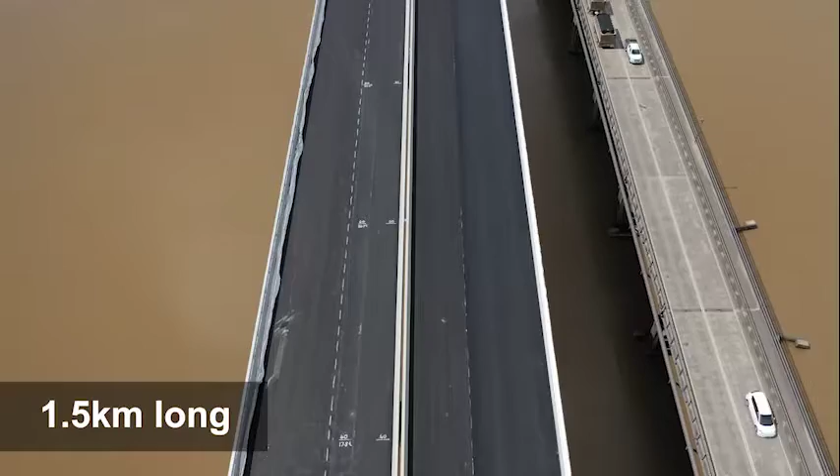I am the project director for Pacifico, in charge of design and construction of the Harwood Bridge. The bridge over Clarence River at Harwood is a design and construction contract for a 1.5 kilometer bridge delivered by Pacifico, Acciona Ferrovial joint venture, as principal contractor.

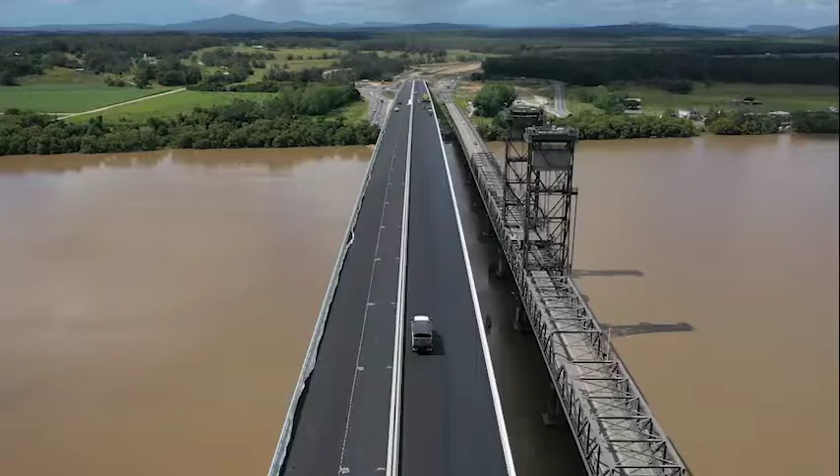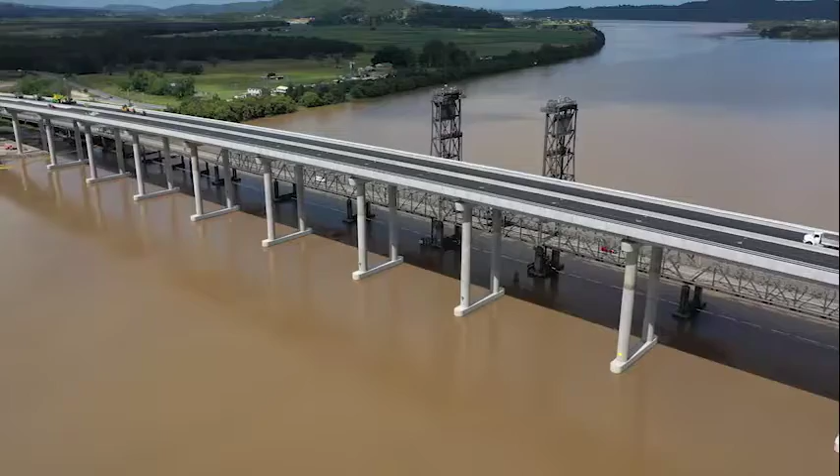The project is just a small part, 1% of the total length of the 155 kilometer project upgrading the Pacific Highway from Woolgoolga to Ballina under a delivery partner model by Pacific Complete, Laing O'Rourke and Parsons Brinckerhoff joint venture, for RMS as the final client. Even though it is a small project in comparison with other civil projects, it has been very challenging in terms of safety, environment, community and time frame.

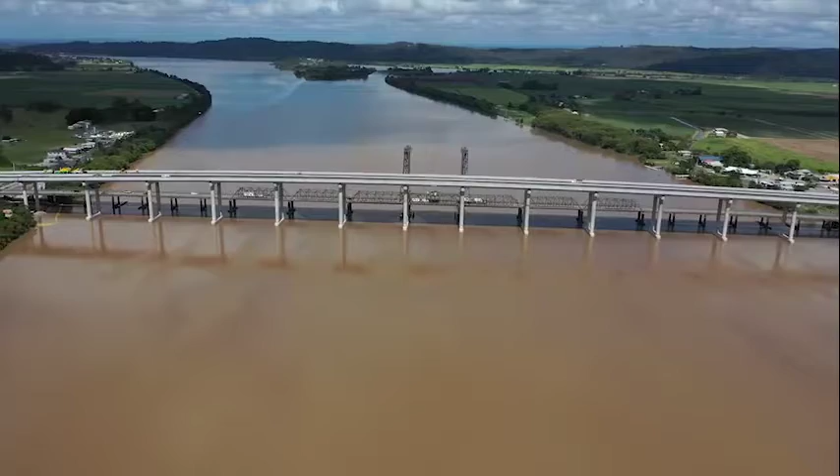The most impressive achievement to highlight has been the delivery of this huge structure in just two and a half years, starting from a blank piece of paper. The geotechnical investigation, design, procurement and construction were overlapped, assuming reasonable risk without taking any shortcuts in terms of safety, with no relevant environmental incidents or community complaints.

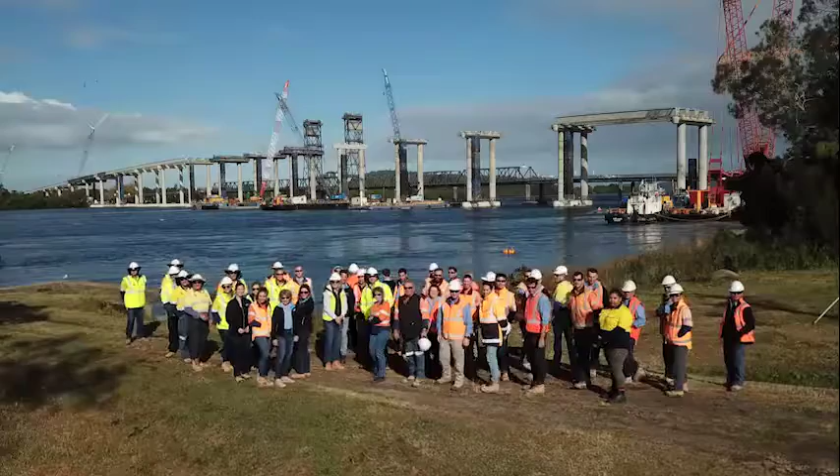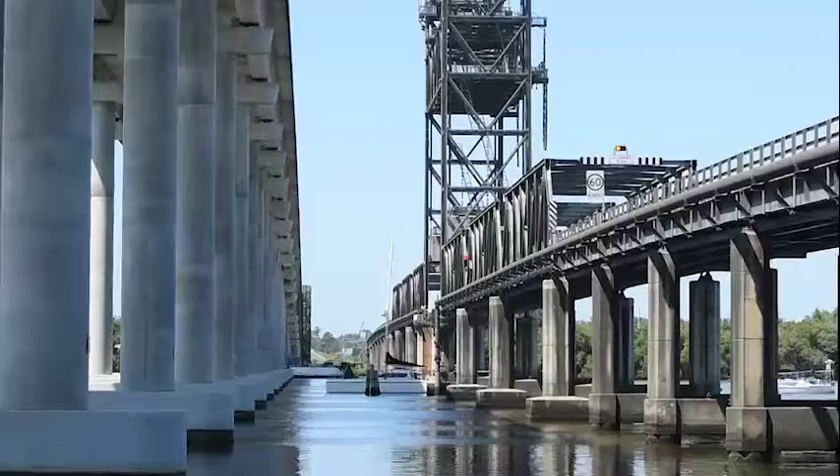The secret for that? A very strong and high performance team and collaboration between the parties involved. We are very proud to show you how this project has become a new benchmark in the construction industry. For the last 2 years, the AFJV team have been involved in construction of the new 1.5 kilometer long bridge over Clarence River, 20 meters downstream from the old one opened to traffic in 1966.

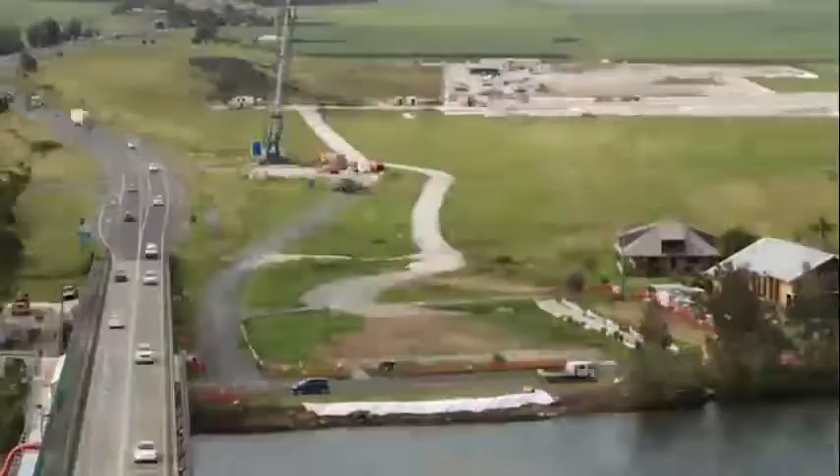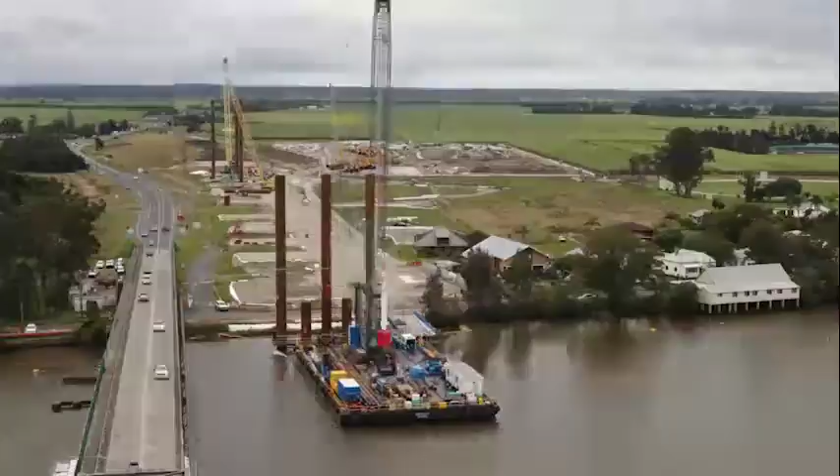We started with the site compound setup, concrete mobile plant and precast yard establishment in order to start manufacturing of a new innovative flagship product, U-girders. In parallel, we were mobilizing barges and big crawler cranes, building a temporary jetty, and starting driving steel driven piles, one of the biggest piles in Australia, requiring a specialized hammer imported from Singapore.

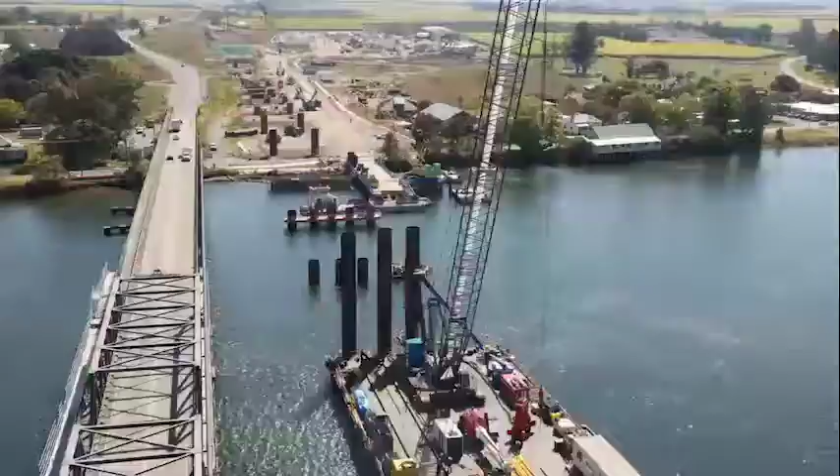At our peak time, there were 4 barges, all fitted with crawler cranes, working alongside and engaging in all marine substructure works carried out simultaneously. All works were done by an experienced FAJV self-performance crew and highly specialized subcontractors, providing a high level of performance.

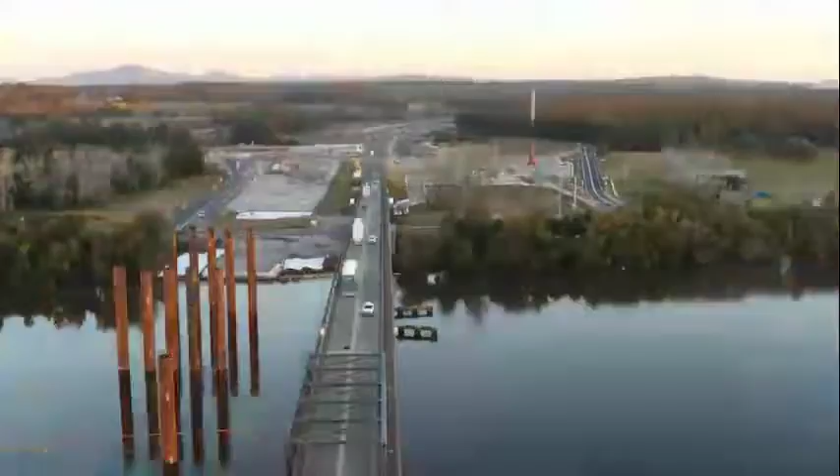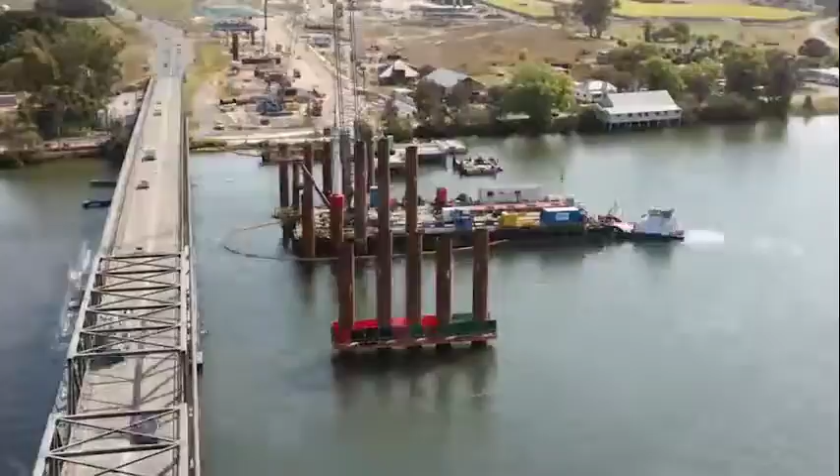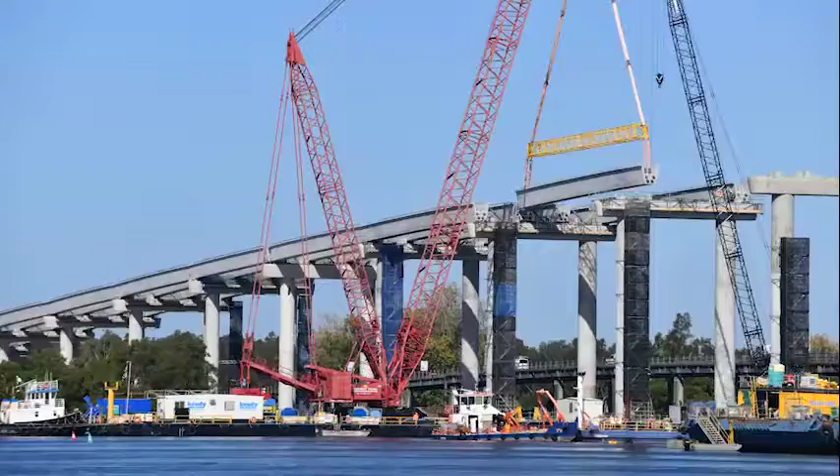The marine works have been one of the most challenging parts of this project, and they started late in 2017 with the construction of the piling and continued later with the construction of the pile caps, columns and headstocks. Maybe the most impressive activity was the installation of the 48 girders utilizing the 750-ton crane on top of the Rebecca Lilly barge.

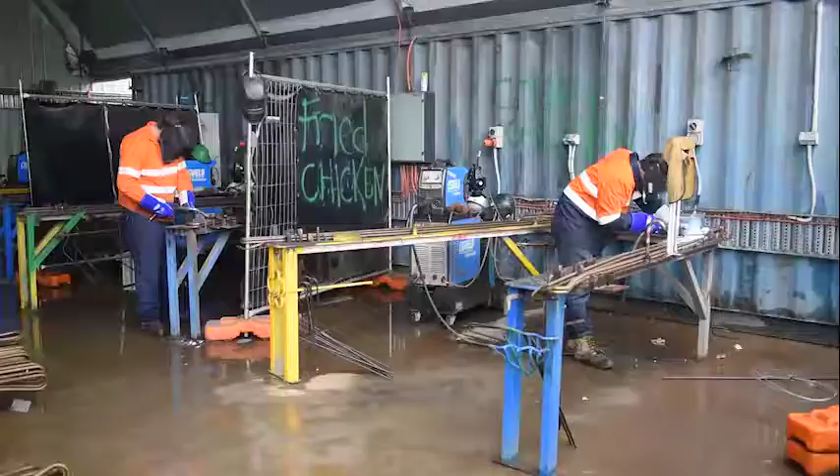We established a facility to produce 144 girders, but we also produced transfer panels and parapet barriers. We commenced building the precast facility in May 2017 and produced our first girder in September 2017. Our production process was quite efficient. We were able to produce up to 5 girders a week, and we commenced delivery to the bridge in November 2017.

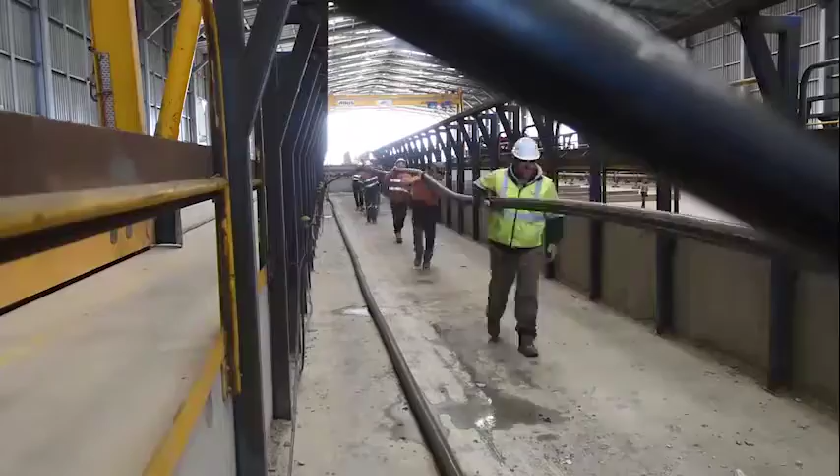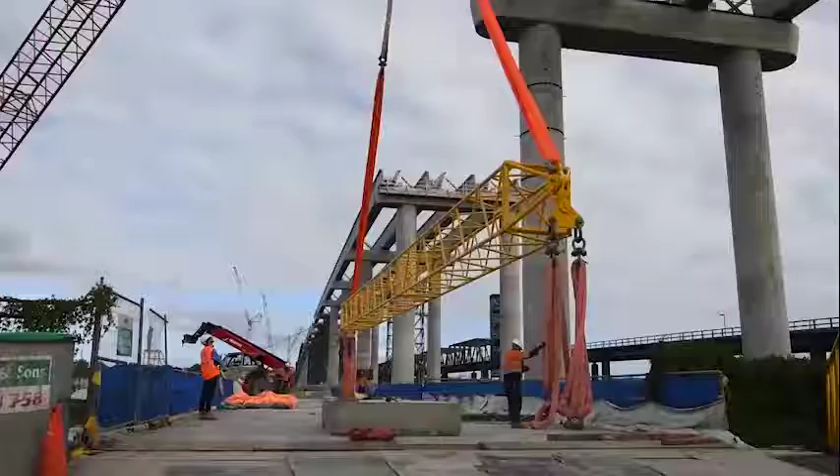The last step of the process was to deliver the girders to the river, where we used the straddle carriers to take the girders down to the jetty, where they were lifted onto a barge and out onto the river. Production of the girders was completed in June 2018, and the last delivery was in July 2018. We also completed the transfers and parapets, where the last one was erected in November 2018.

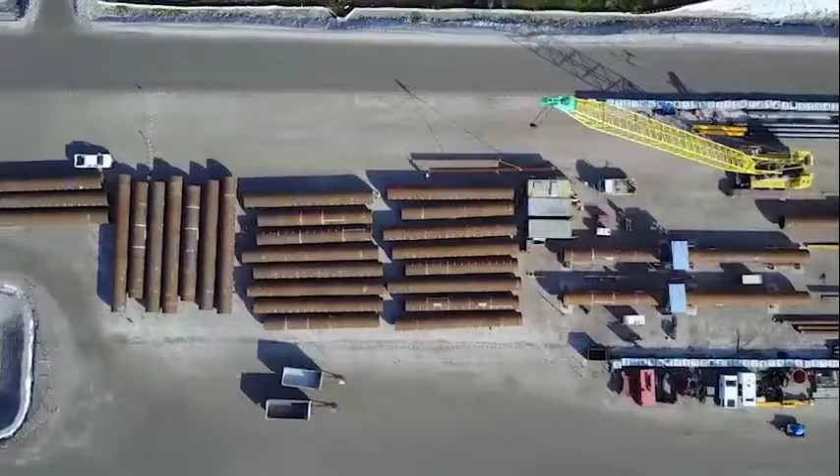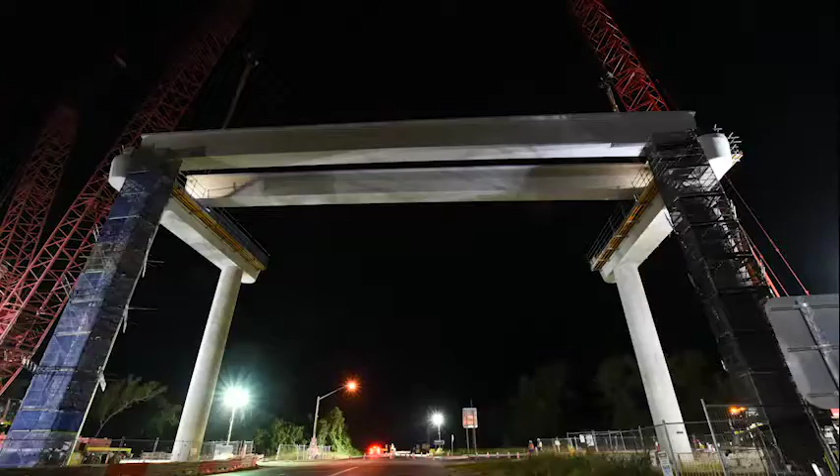The new bridge has been a fantastic project with many engineering challenges, from huge 60-meter long, 2.4 meter diameter steel piles to a 750-ton crane lifting 169-ton girders onto the substructure. We have tackled and resolved all these challenges in collaboration with the Pacific Complete team and RMS.

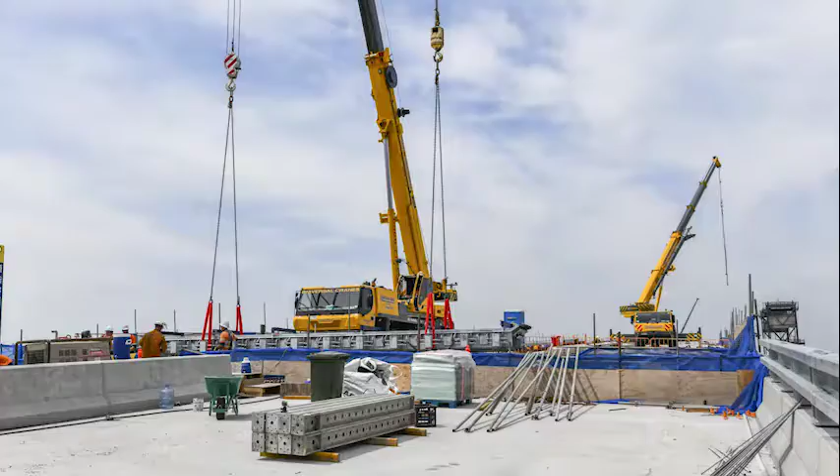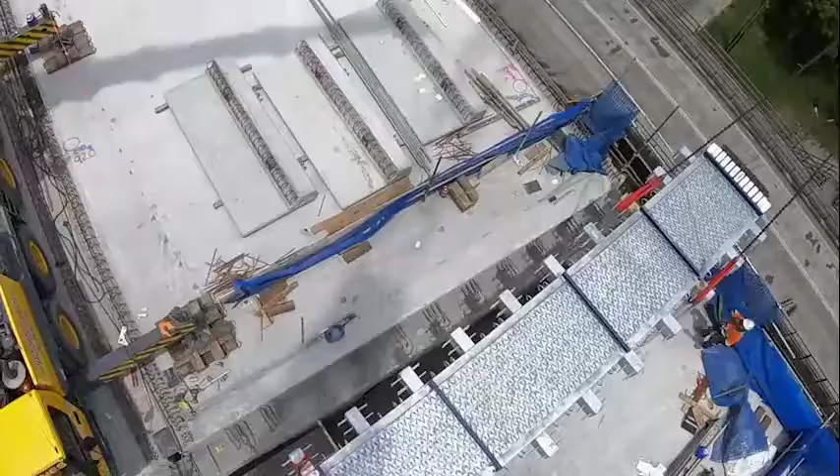One of the major innovations that we have on this project are the sinus plate expansion joints located at each bank of the river. The client had concerns over noise issues. These sinus plates have noise mitigation plates at the top which muffle the sound created by traffic. We have rubber curtains and noise curtains at the bottom of the expansion joints, which results in a very quiet expansion joint system.

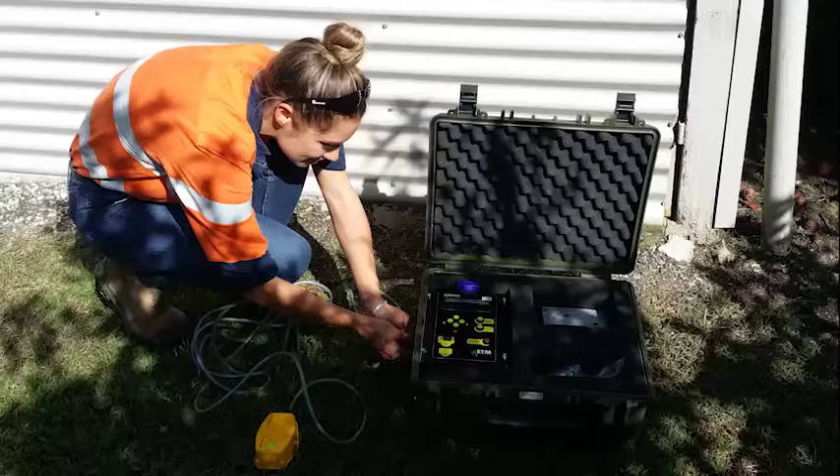The Harwood Bridge design and construct project over the Clarence River has provided many opportunities to avoid and/or minimise adverse environmental impacts on the local industry, such as the prawning industry, our local community and the Clarence River. Some key achievements have been driven piling, chosen over bored piling to reduce the amount of acid sulphate soils produced, attended vibration monitoring, providing real-time feedback to the piling operator, and developing and implementing procedures during piling to protect the resident population of dolphins, such as shutdown zones and soft starts.

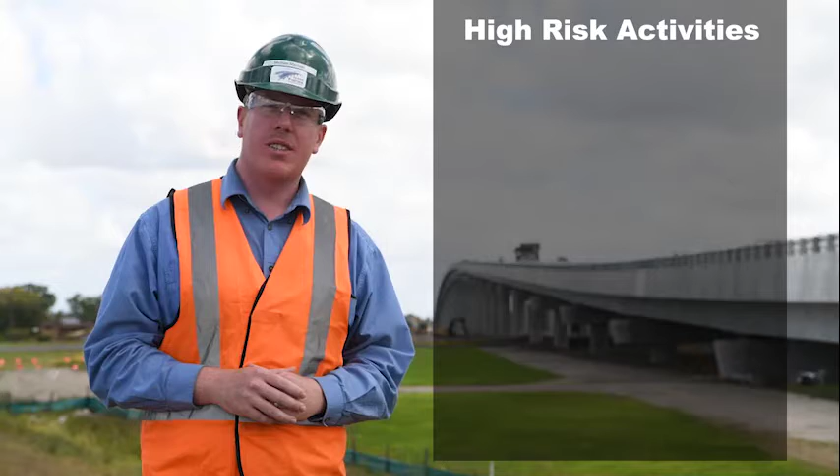As part of this project, developing and implementing a clear and positive safety strategy has been a key to its success and a number one priority. Due to the complexity of the structure and the associated safety risks, there have been a number of key challenges to overcome. These have included managing the following high-risk activities: temporary works, plant and equipment, cranes and lifting, working at heights, electrical work, precast concrete, work over water and traffic management.

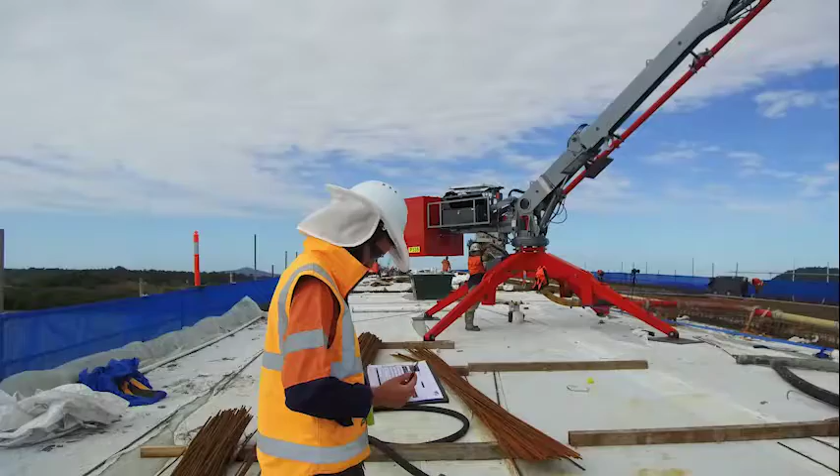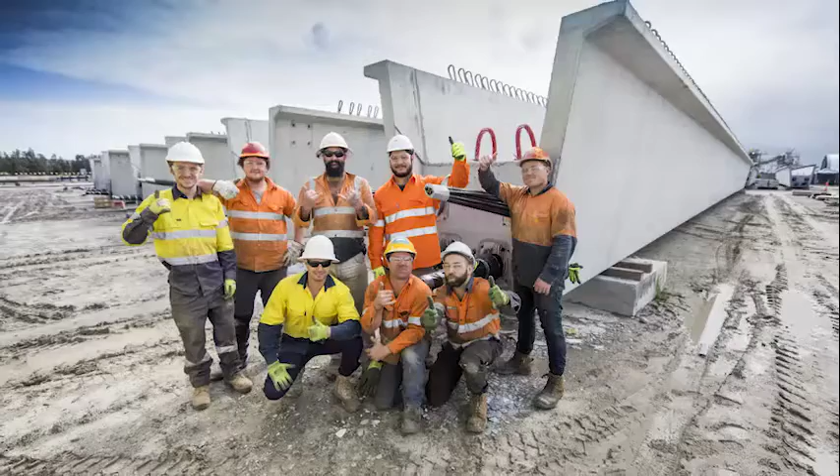Good outcomes have been achieved in these areas by placing empowered people at the centre of decision making and in doing so ensuring transparency and accountability. Empowering our people has been achieved by implementing the following measures: displaying visual leadership on site on a regular basis, being available to discuss any issues on site through our SLT engagement walks. Workforce engagement has been designed to encourage participation and give everyone the opportunity to discuss how we can improve, whether that be during an incident investigation or positive event.

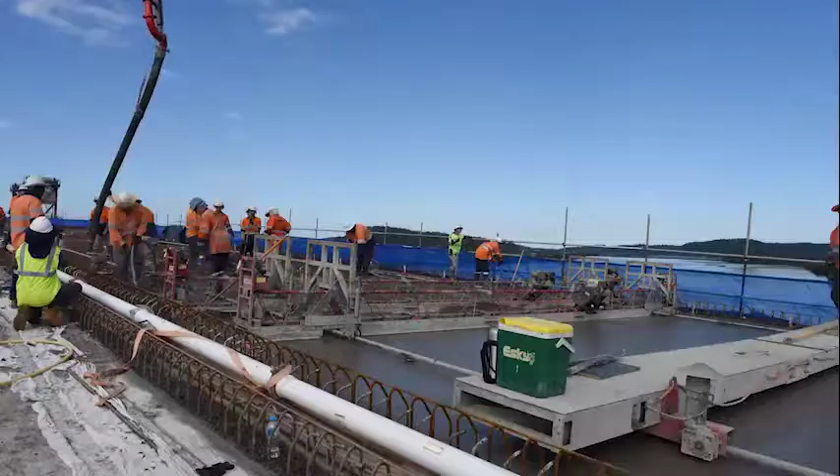Reward and recognition, recognising individuals or groups driving safety initiatives and good safety practices on a monthly basis. And industry engagement, engaging with the regulator to openly discuss methods to develop our safety culture and improve our safety practices through monthly site visits.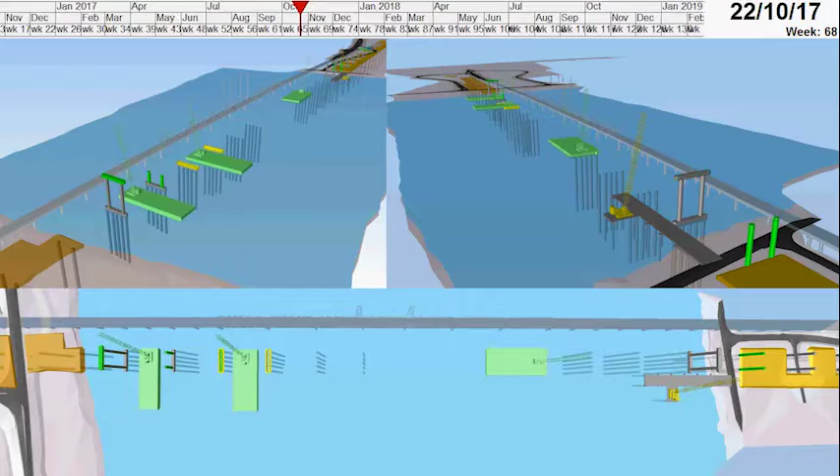We face a big challenge here in Harwood, as applying BIM in infrastructure is not always as easy as in vertical constructions. We made the most out of the digital 3D model and its metadata during all those phases of the project. Starting from creating a 4D visual program to share amongst the team in a video format.

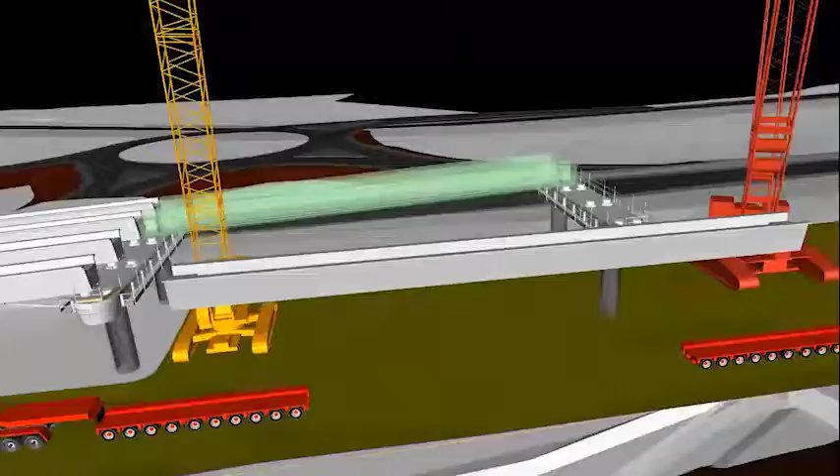We use it extensively as a virtual construction design tool. For instance, optioneering the installation of the girders both on land and on the river. We were checking that all the constraints were taken into consideration and making sure that once on site, the activity was carried out as planned in the digital world.

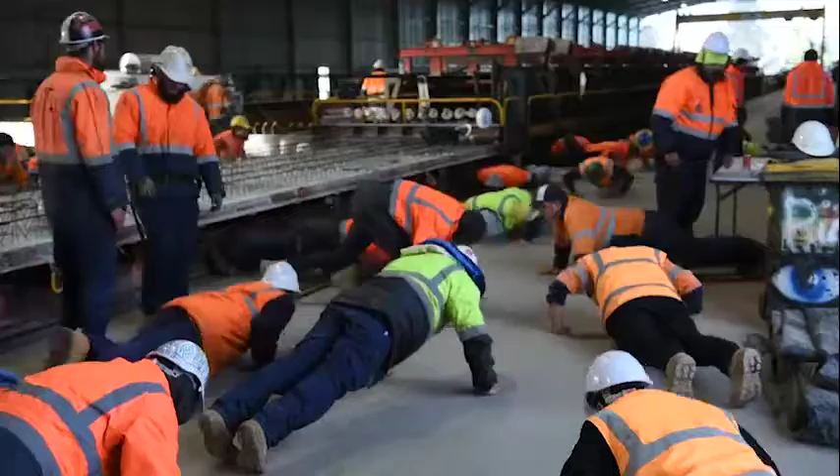I joined the project just prior to construction commencement. At the time there were only 14 staff. At peak, we reached a workforce of just under 400. Early in the project, a number of team building activities brought RMS, PC and AFH JV together to assist with forming strong working relationships. A charter was developed to ensure that all those included in the project understood the project team mission and values.

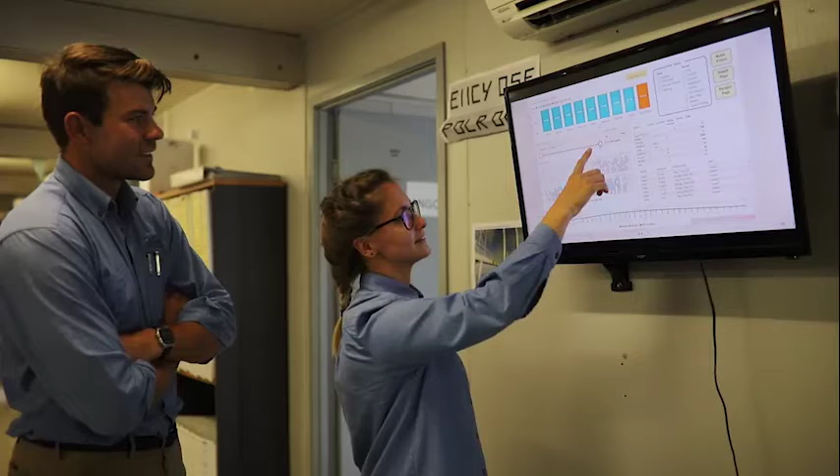As a member of the quality team, we work closely with the delivery partner Pacific Complete and RMS. It has been through the collaborative working relationships that we've been able to see the timely closure of quality records and the resolution of issues as they arise. We have proactively managed and reported the closure of quality records, achieving a high closure rate of 80 to 90% for lots, NCRs, hold points and other quality records. We only have a small number of NCRs for the project, 140 at the time of this report.

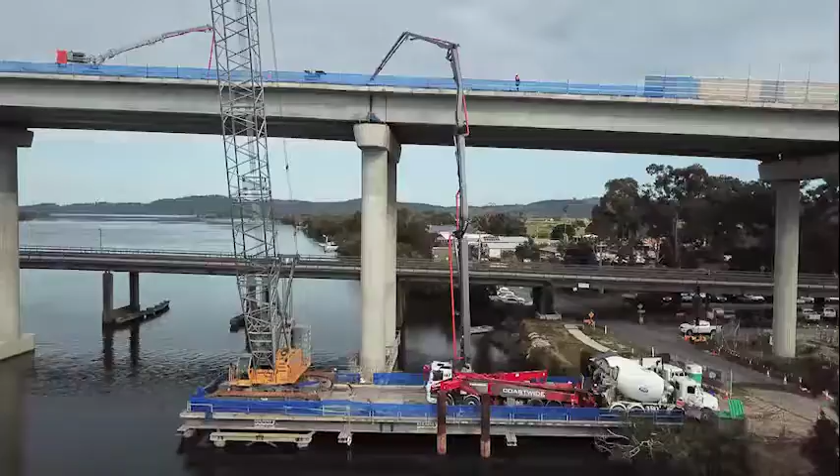Unique bridge requires unique labour, obviously, so as a team we've managed to broaden the skills of all the guys working here. So the collaboration was really good. The communication and the cooperation were standouts. The client and Pacific Complete were always on the same page, right down to the worker level. So it was a tough program to meet. Obviously there were long days, but the work and camaraderie between all the people involved really got us over the line.

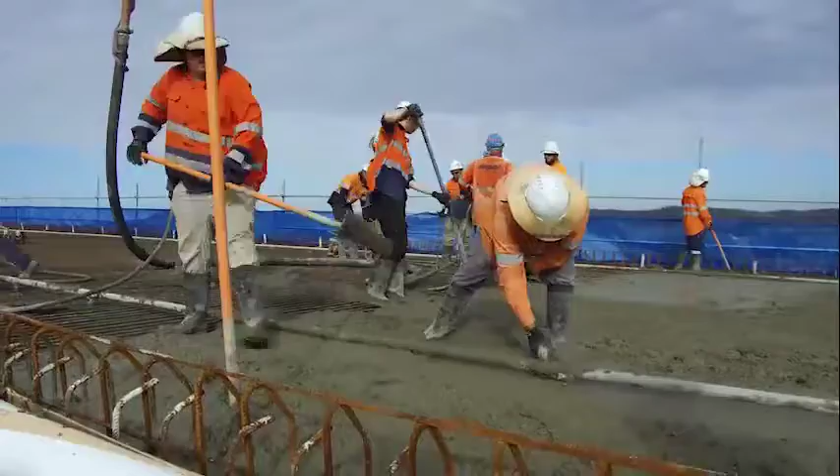What's been done really well would be time frames of things, like reaching milestones at the right time, and the way all the workers get on with the collaboration between the leadership. It's all been very good. Everybody got along on the job. It was really good.

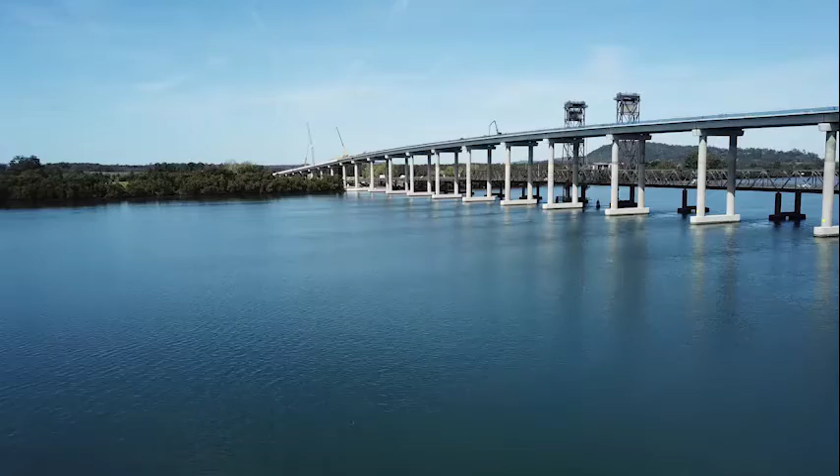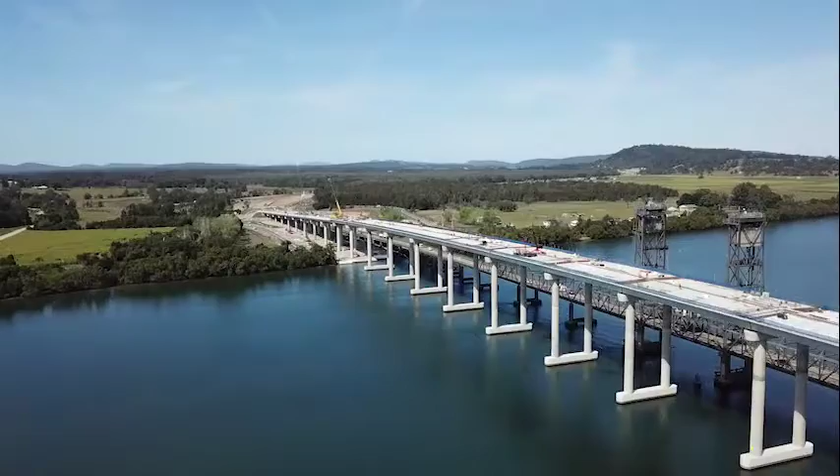A key section of the 155 kilometre long project has been the procurement, design and construction of the 1.52 kilometre long bridge over the Clarence River at Harwood. The bridge design has provided an efficient, economical design which has addressed the constraints of the site, including matching the existing highway bridge spans, achieving required river clearance, minimising impacts on flooding and addressing soft soil issues.

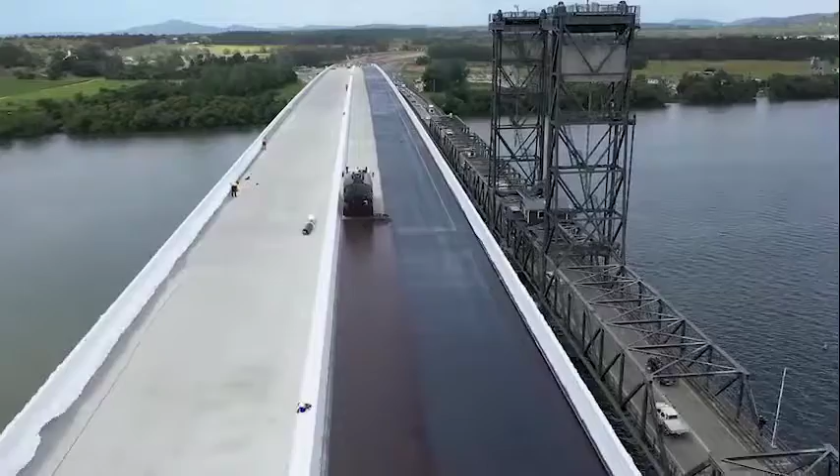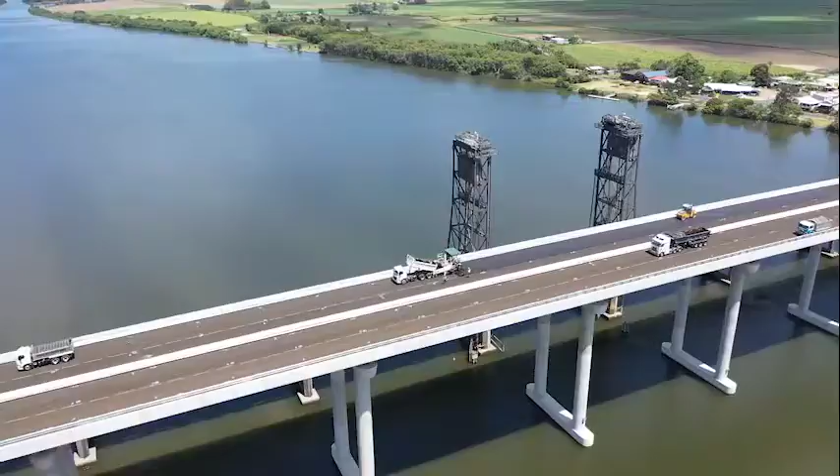The project team learned quickly from early lessons to enable the project to continue to meet both cost and time objectives throughout the life of the project. This was made possible by a very high level of collaboration being developed between the design and construct contractor Acciona Ferrovial Joint Venture, the project delivery partner Pacific Complete, and the client Roads and Maritime Services.

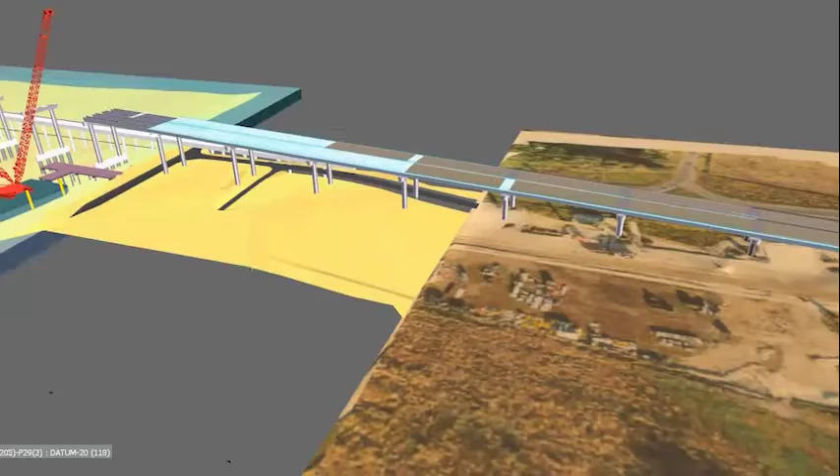In my field, one of the biggest challenges we faced during the project was maintaining and establishing a control network, which allowed us to link the 60-metre length gap in the most precise way during every single stage of the project whilst moving over the Clarence River. This was achieved by hard work, excellent management, and a great relationship between colleagues. As a junior member of this team, I'm very grateful to have been part of a project where there was so much focus on training and development.

This project has a very good relationship with the Harwood community. There have been very few complaints and disruptions. It's a lovely little community, historically based around the local sugar mill. They know that when the new bridge and the highway are opened, there'll be less traffic on the local roads and less traffic noise, which will be a good outcome for them. Overall, they've been very supportive.

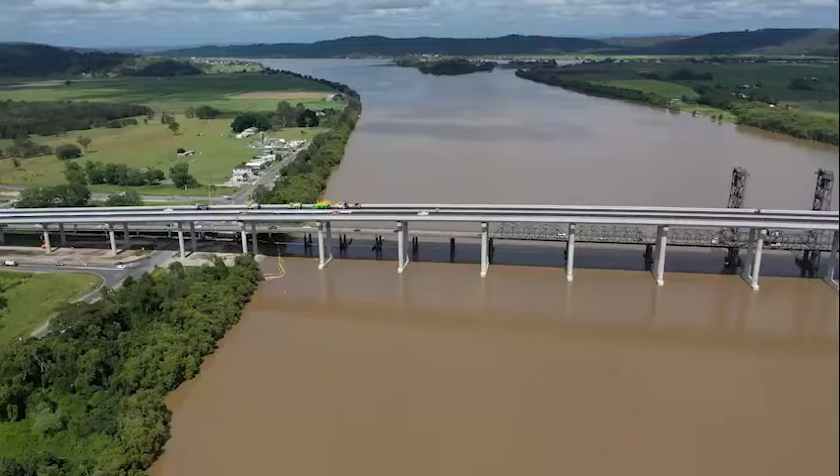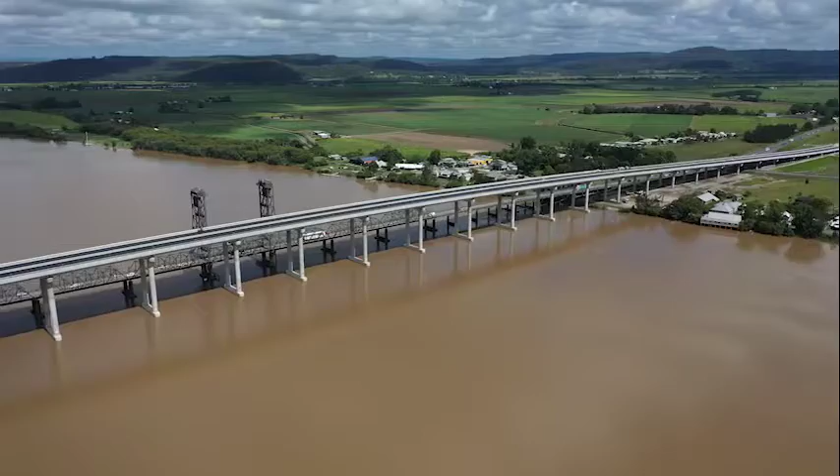I have been involved with the Harwood Bridge project from the pre-tender stages in early 2016. Following the tender period, the contract was awarded to Acciona Ferrovial Joint Venture on the 7th of July 2016. From the client's perspective, the project has been a huge success in many ways, in particular with respect to the quality of the end product that we see here today. The success of the project has been achieved continuously throughout both the design and construction stages, and this has been as a result of a structured approach to collaborative contracting.

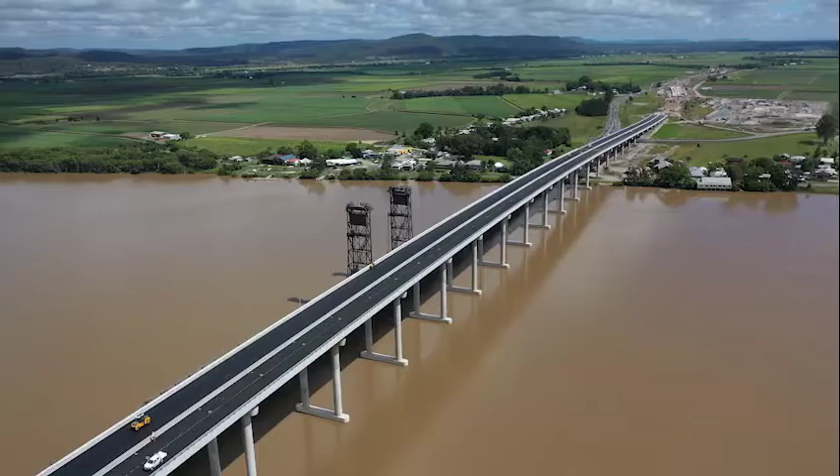The project team encountered and overcame some significant technical challenges, but on each occasion the client and the contractor have worked proactively together to develop a best for project outcome. The project is now in the final stages and both the client and the contractor are taking great pride in what we have achieved. I truly believe that this bridge has been built by a fully committed and collaborative team which will serve the Australian community, providing a safe and comfortable passage over the Clarence River.